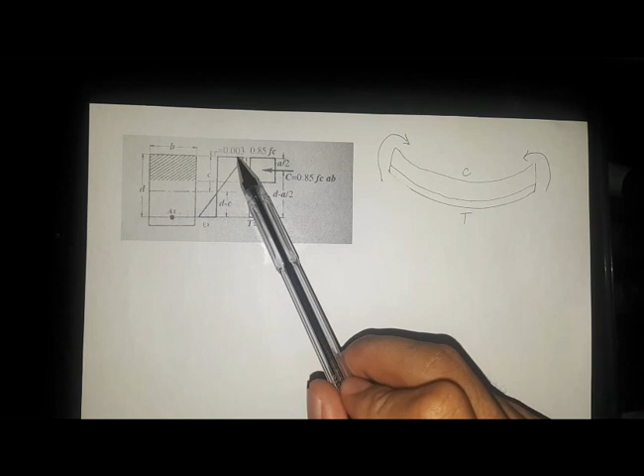So according to NSCP 2015, it's tension controlled when our strain in the steel is greater than or equal to 0.005. That's what NSCP 2015 says.

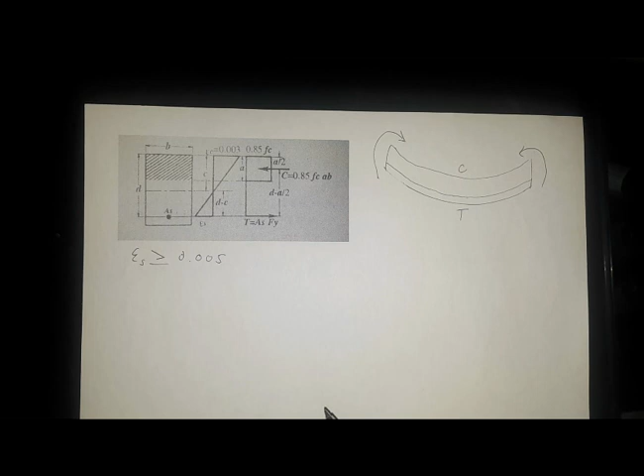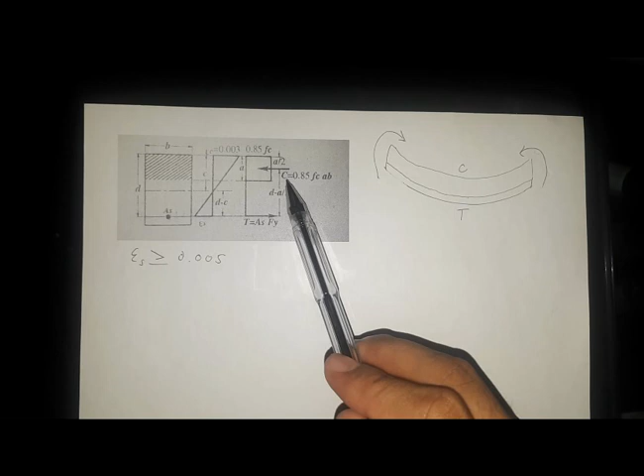Now, if you notice, this is our 0.85 F prime C - that's the compressive stress. Multiply it by the area to get the compression force. If you remember from strength of materials, stress equals force over area. Same here for tension: AS times Fy, so AS is the area of steel multiplied by Fy.

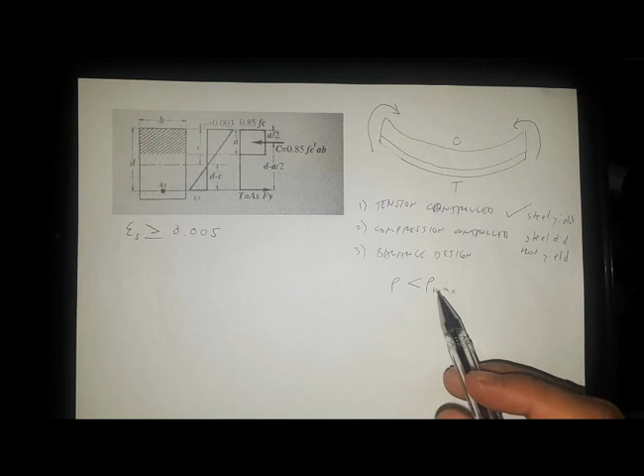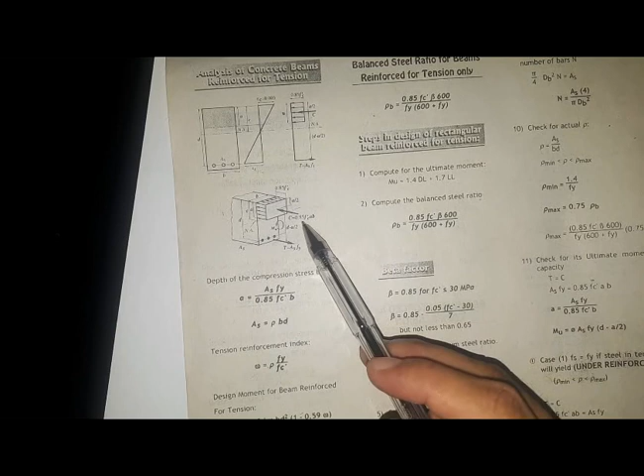So here we have the depth of the compression stress block. A equals AS Fy over 0.85 F prime C B. Then AS equals rho BD. Where does this come from? This: C equals 0.85 F prime C AB. Equate C to T, and you get this.

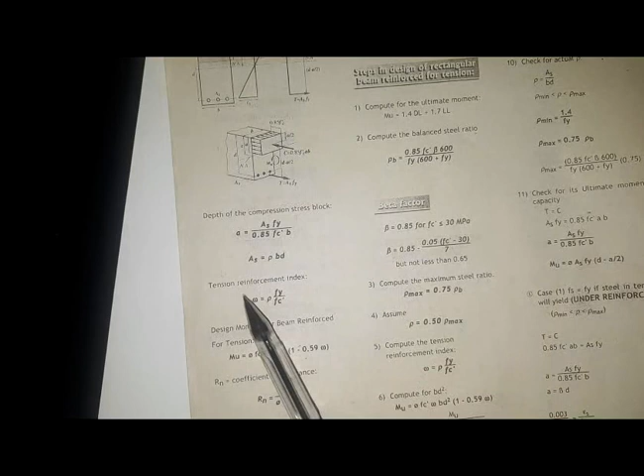We also have the tension reinforcement index given by omega equals rho times Fy over Fc prime. So when we design the moment for a beam reinforced for tension, this is the ultimate moment equals the strength reduction factor multiplied by F prime C times the tension reinforcement index multiplied by BD squared times 1 minus 0.59 omega.

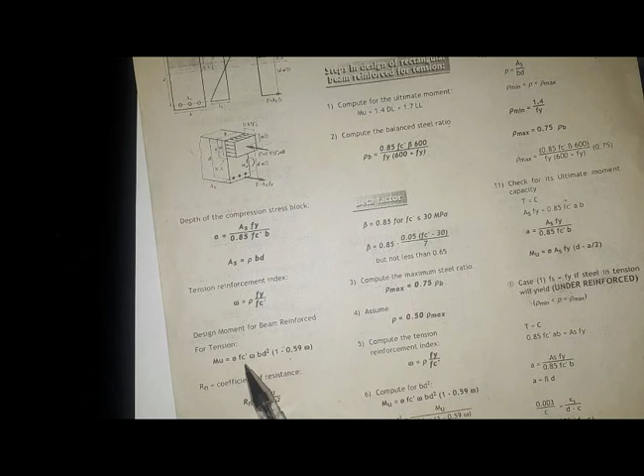So this is our Rn, the coefficient of resistance, Mu over phi BD squared. And this is the phi, or what is called the strength reduction factor. This is the updated version in NSCP.

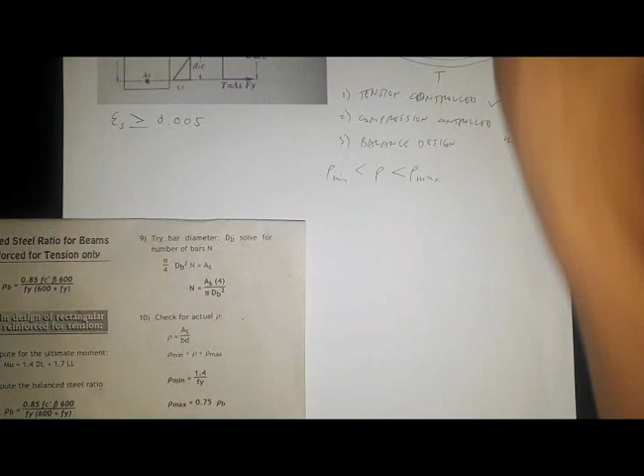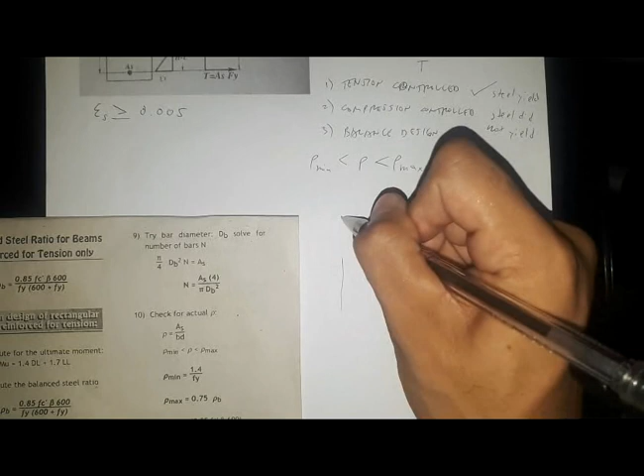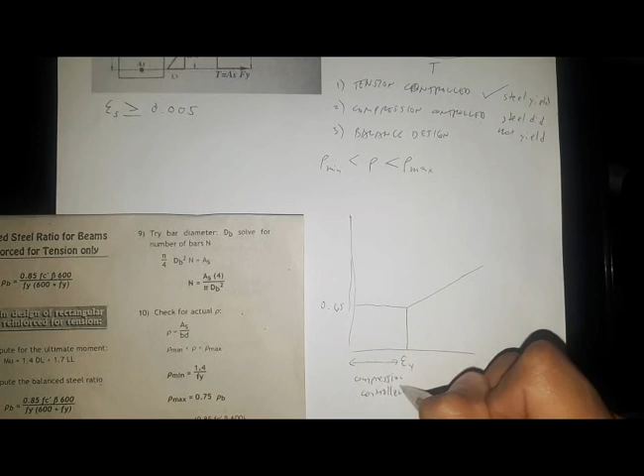So in table 421.2.2, let's make the diagram. The minimum is 0.65. If you have your strain here, that's compression controlled. Then for spirals, the minimum is 0.75, and the maximum is 0.9.

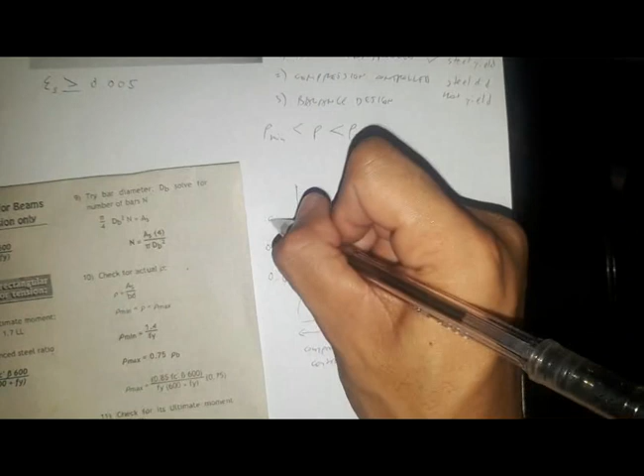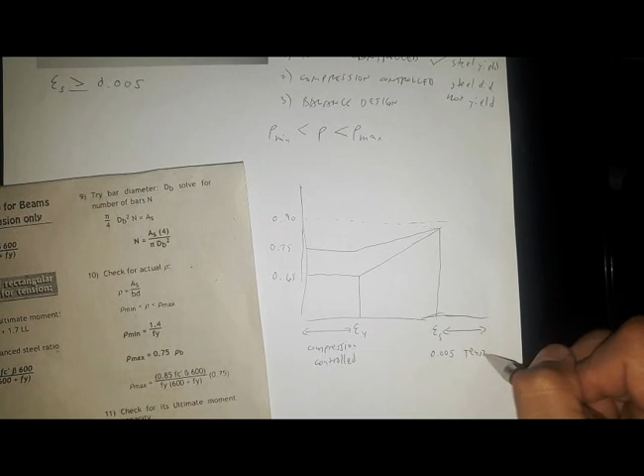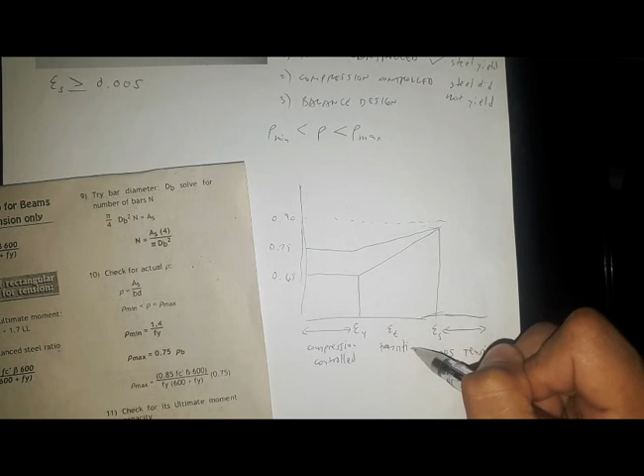So kapag nandito siya sa labas nito ng strain ng steel na 0.005 pataas, dito tension control. While kapag in between, andito yung tensile strain, so ito yung tinatawag natin na transition.

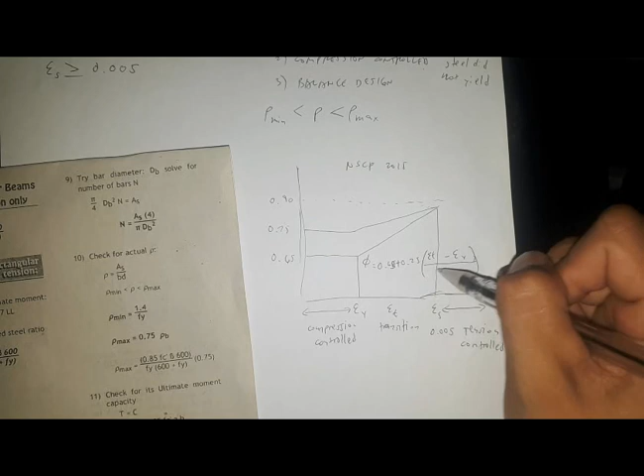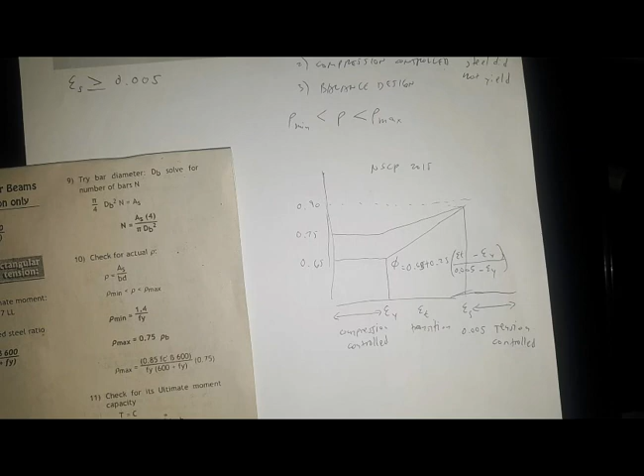So yung formula updated natin based on NSCP 2015. We have here the reduction factor equals 0.65 plus 0.25 multiplied by the tensile strain minus ito, so compression controlled strain, divided by 0.005. So yung strain and tension controlled minus ito yung compression controlled na strain. So yan yung formula natin. So minimum na natin yung 0.65.

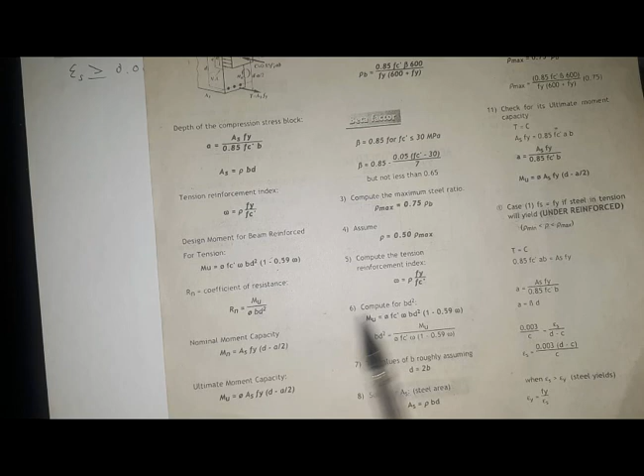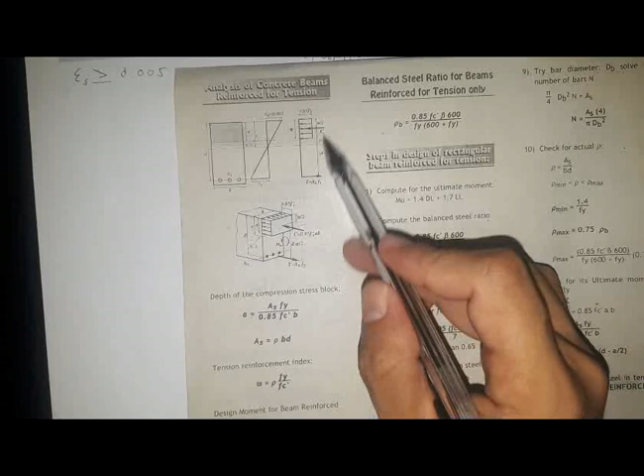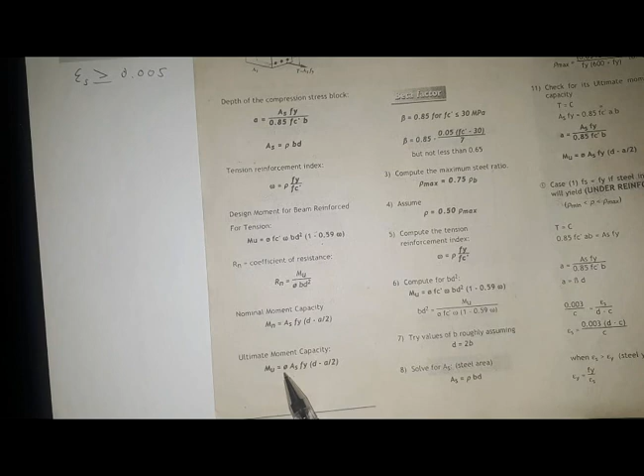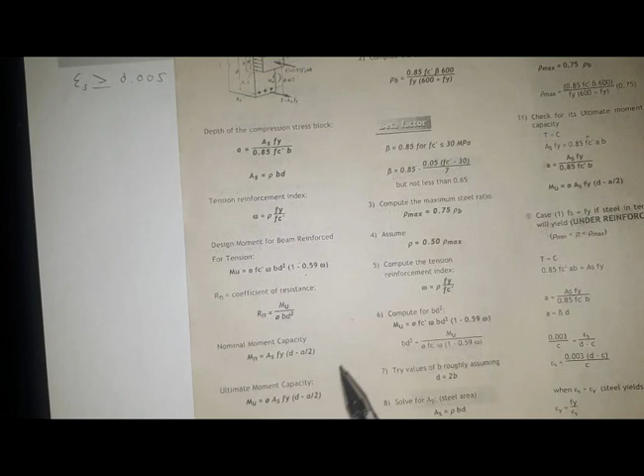Mabalik tayo dito. Nominal moment, kapag wala pang stress reduction factor, that is AsFy times D minus A over 2. Kasi kapag nag-moment ka dito sa C, eto na yan, nag-moment ka sa C, eto yung tension multiplied by the moment arm, D minus A over 2. Ultimate moment capacity, multiply mo lang siya ng phi, phi Mn, yan na. Pwede ka din mag-moment dito sa tension, gagamitin mo naman yung compression, 0.85 F prime C AB multiplied by the moment arm.

Dito na tayo sa balance steel ratio for beams reinforced for tension only. So ito yung rho balance, 0.85 F prime C beta times 600 over Fy multiplied by the quantity of 600 plus Fy. So ito pa rin yung formula.

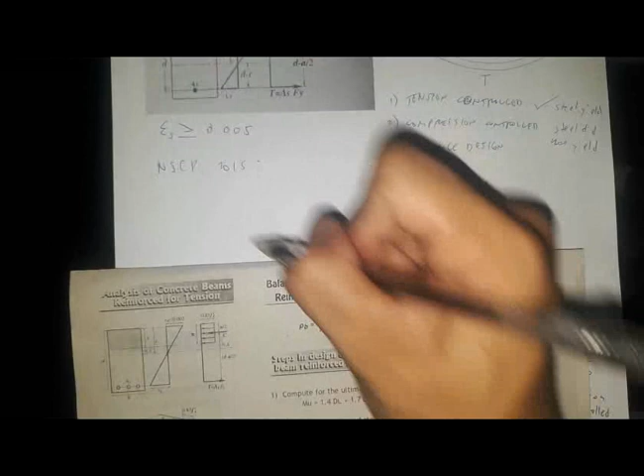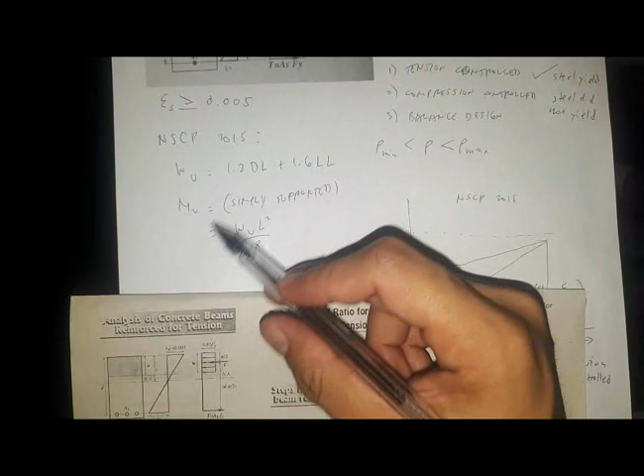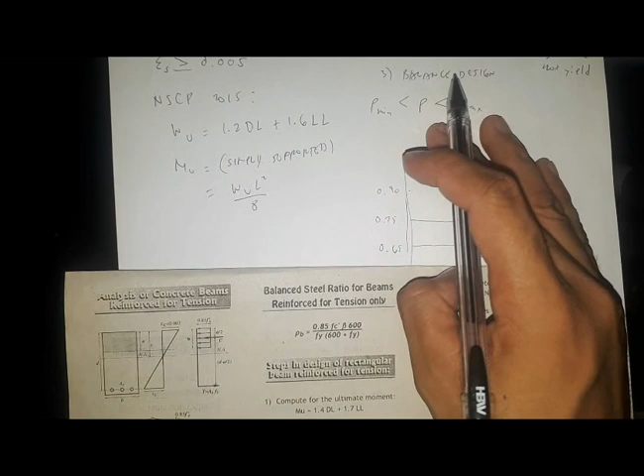So steps in design of rectangular beam reinforced for tension. So ito yung MU, bago na ito ngayon sa NSCP 2015. Hindi yan MU actually, that is factored load WU equals 1.2 DL, yung dead load, plus 1.6 LL. While yung MU, kung sa simply supported, MU natin equals WU L squared over 8. Tapos meron din tayong mga values nito, ultimate moment, depende dun sa kung ilang span ng beams. Meron din tayo niyan sa NSCP natin. Sa mga susunod na videos, yun naman tatalakayan natin.

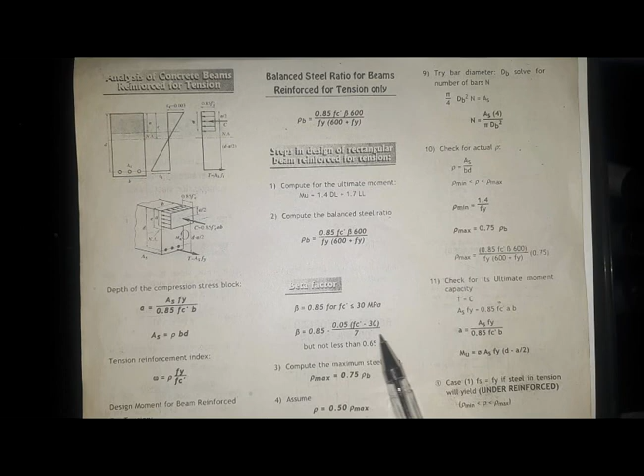Now, step two, compute the balance steel ratio using the formula. You will notice here the beta factor. Ito yung lumang beta factor: 0.85 for f prime c less than or equal to 30 MPa. Then we also have 0.85 minus 0.05 times f prime c minus 30 over 7, but not less than 0.65. So bago na ito pagdating sa NSCP 2015.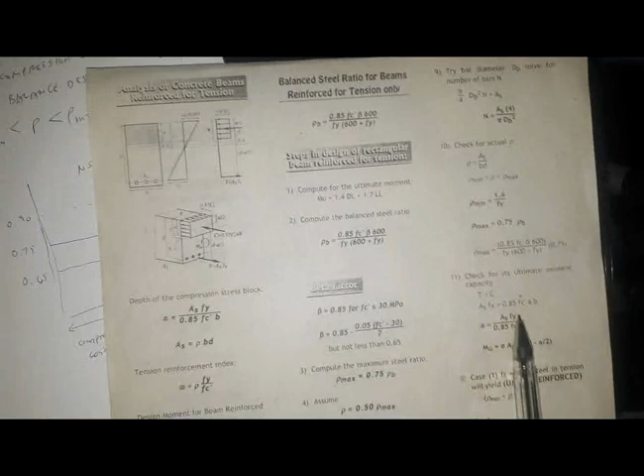Yung beta factor natin sa NSCP 2015: 0.85 when f prime c or fc prime is greater than or equal sa 28 megapascal, less than or equal, but greater than or equal sa 17 megapascal. So 17 megapascal yung minimum. So ito yung 0.85.

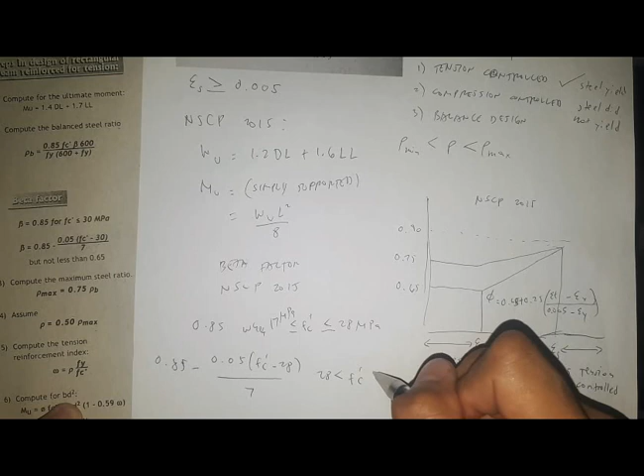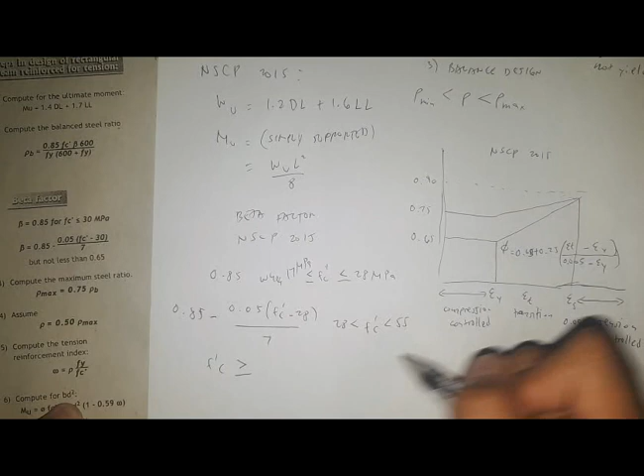Now gagamit naman tayo nung 0.85 minus 0.05 times f c prime minus 28 over 7, kapag yung f prime c greater than 28 but less than 55 MPa. But when your f prime c is greater than or equal sa 55 MPa, yung gagamitin natin na beta factor is 0.65.

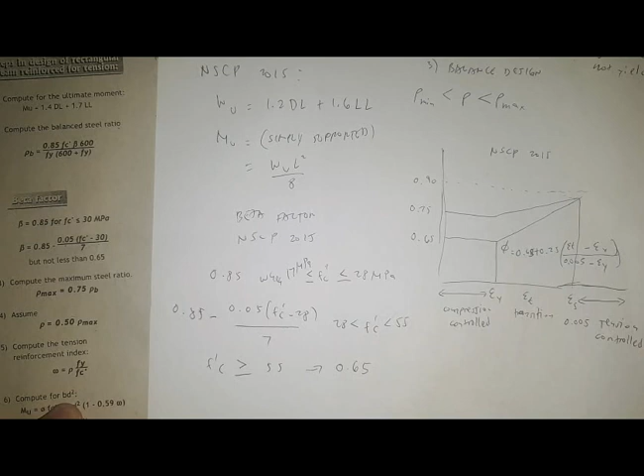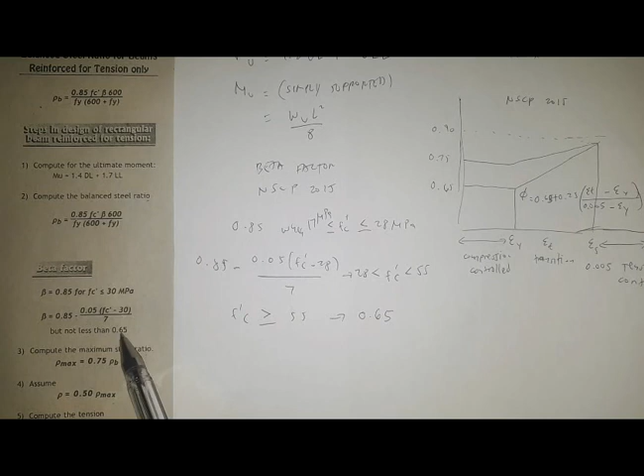So ito yung tatlong instances or tatlong situation natin sa beta factor. We have A, B, and C. So ito yung compare natin dito sa old NSCP natin, 30. Ay, dito 28 na lang.

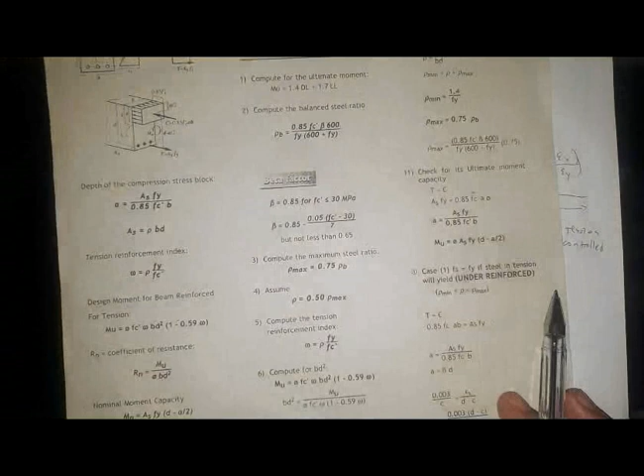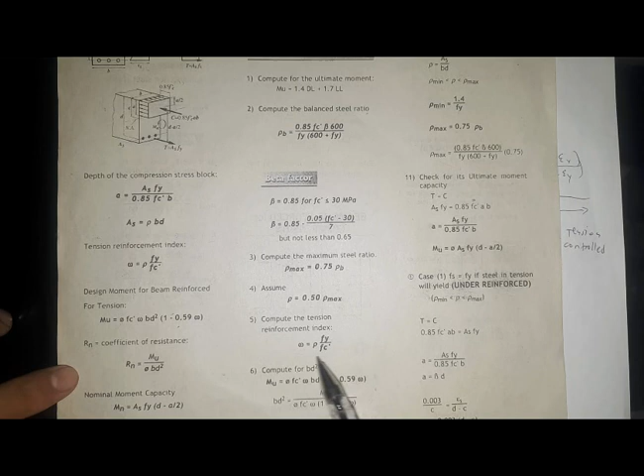Next step sa pag-design, compute the maximum steel ratio. Yung rho maximum is 75% ng rho balance. Then i-assume natin na yung rho natin, yung steel ratio is 0.5 ng maximum rho. Now compute natin yung tension reinforcement index, we have omega equals rho fy over fc prime. Then compute for BD squared.

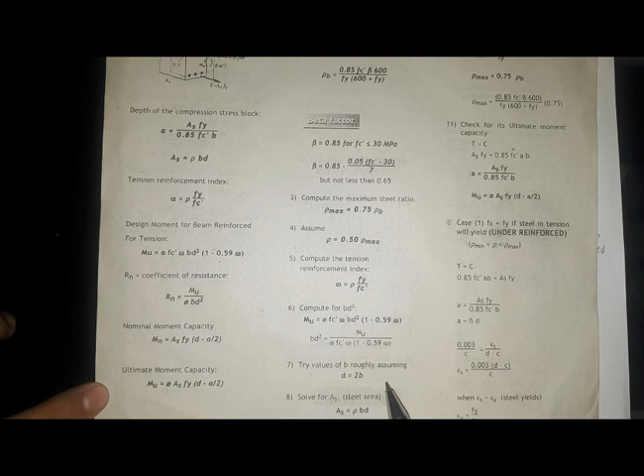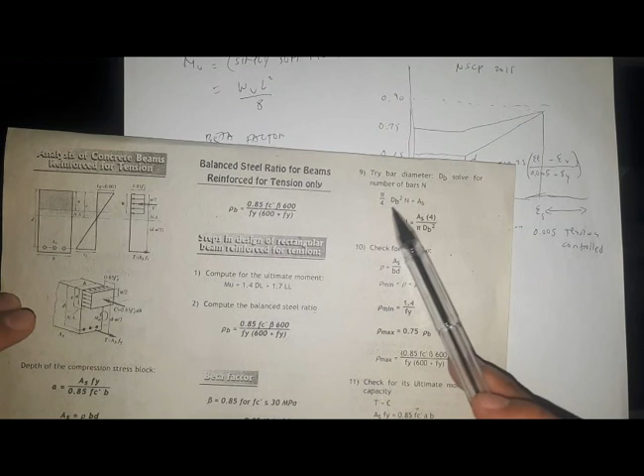Eto na, using the formula kanina sa MU, makuha natin yung BD squared. Then we try values of B. Eto kapag wala pa tayong B and D, so try values ng B, roughly assuming D is equal to 2B. Then we solve for the steel area. Tapos mag-try tayo ng bar diameter using the number of bars, pi over 4 times diameter squared times n equals As.

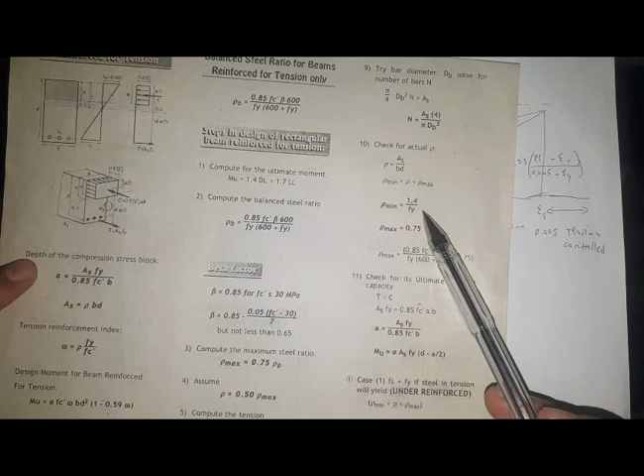Now we check for the actual steel ratio. Dapat yung rho natin greater than minimum rho and less than maximum. Kasi kapag bumaba tayo, kulang tayo, so mag-fail. Kapag lumampas naman tayo, over-reinforce tayo. So dapat dito lang. Eto hindi na bago ito sa minimum. Sa NSCP, minimum is 1.4 over Fy. Meron pang isa yan.

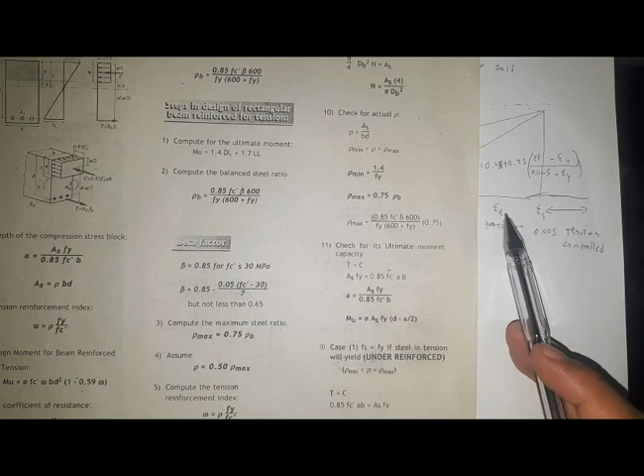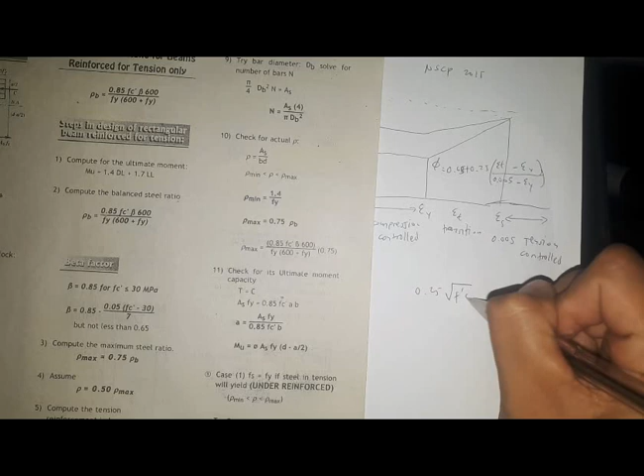Okay, so minimum area shall be greater than 1.4 over Fy, o kaya naman yung 0.25 square root of f prime c over fy.

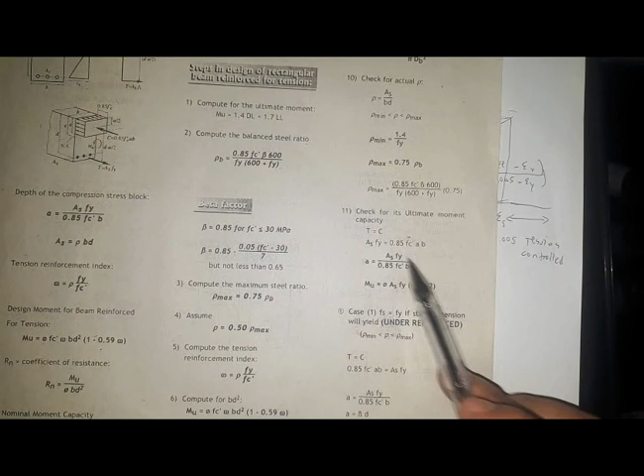Now we check for its ultimate moment capacity, T equals C. So AsFy is equal to 0.85 f prime c AB. Makuha natin yung A, then ultimate moment.

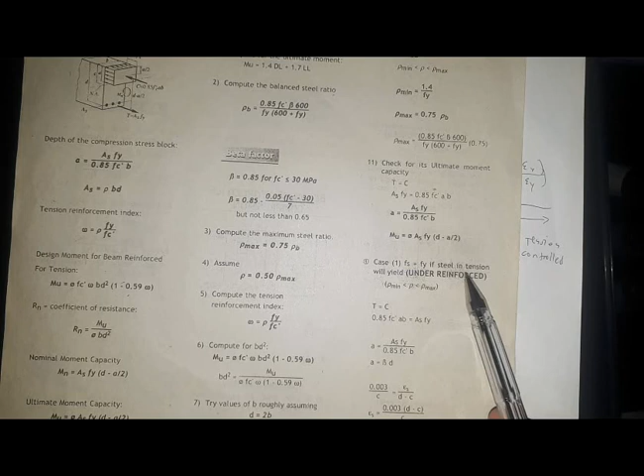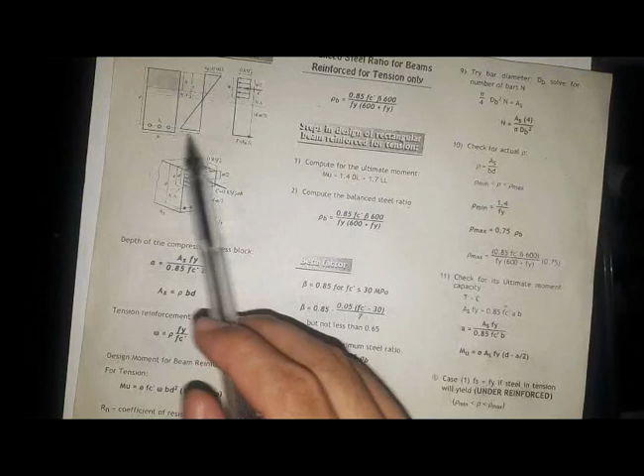Now case 1, if Fs equals Fy, so if steel is in tension, steel will yield, under-reinforce. So ito yung condition natin. So equate natin yung T tsaka C. Yung A is equal to beta times C... ay, D. So i-check natin yan, ratio and proportion: strain is to C equals strain ng steel is to D minus C.

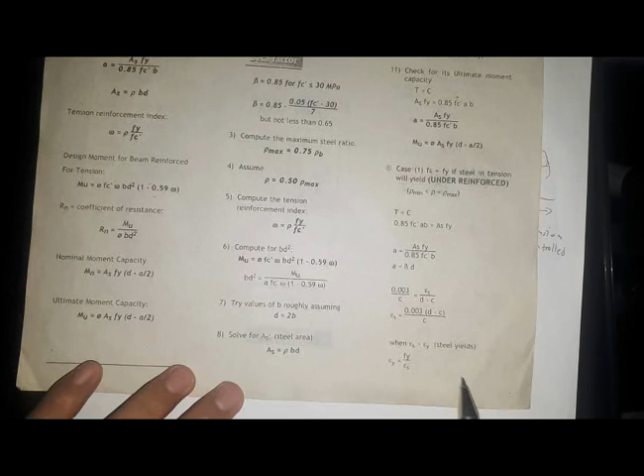So when the strain of steel is greater than strain of yield, so sa minimum yan, Fy over Es, steel yields. Kapag mas maliit, hindi siya mag-yield.

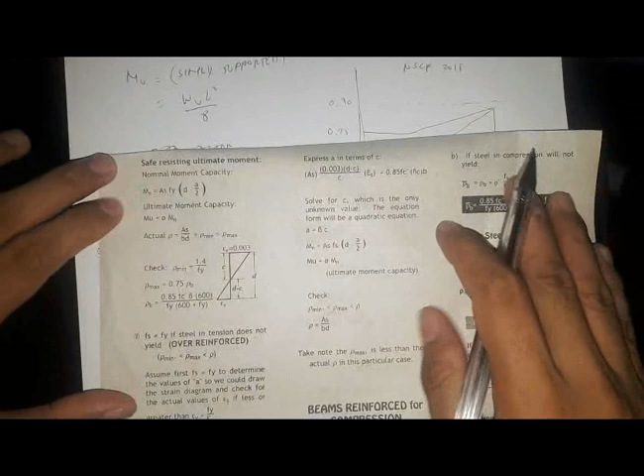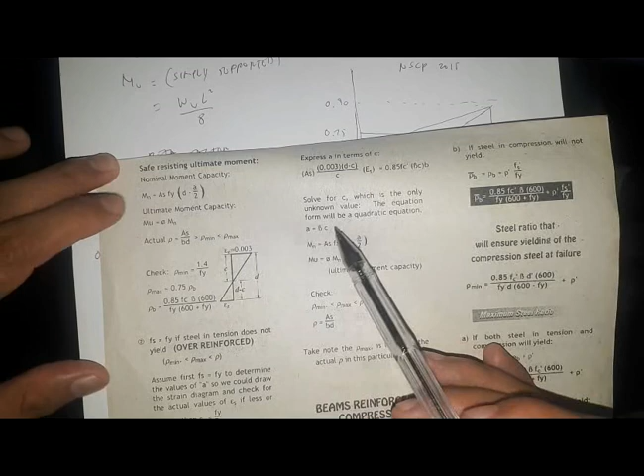Case number 2. Pero bago case number 2, kunin natin yung safe resisting ultimate moment capacity, nominal moment and ultimate moment, tapos yung actual. Dapat greater than minimum but less than the maximum. Mag-check tayo dito using rho maximum.

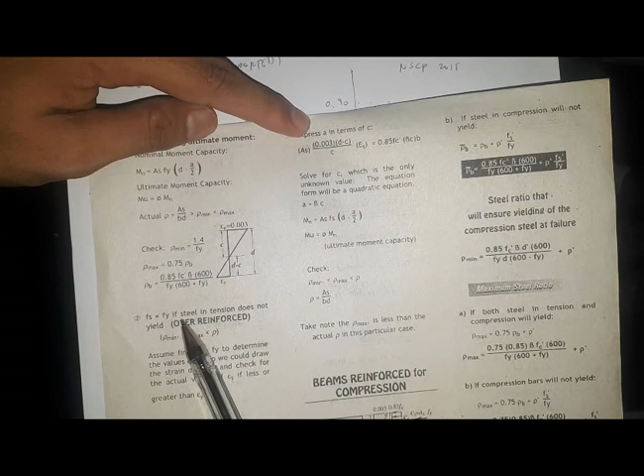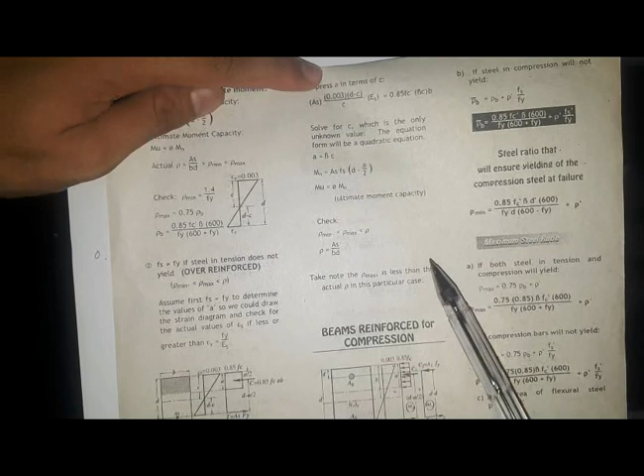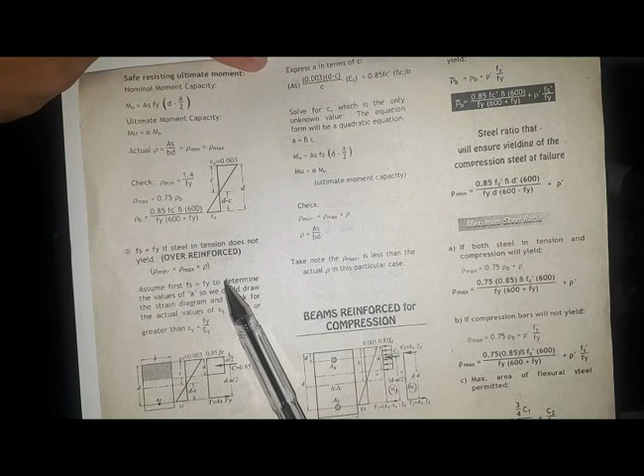Next, Fs is not equal to Fy if steel in tension does not yield, ito yung over-reinforced. Yung rho natin mas malaki sa maximum steel ratio, mas malaki rin sa minimum. So assume first Fs equals Fy. Ito, i-discuss naman natin ito sa susunod na video. Bago ito, mag-example muna tayo nung nag-yield yung steel. So for now, hanggang dito muna tayo. Abangan nyo yung mga susunod na videos natin hanggang sa maubos natin lahat sa concrete design.